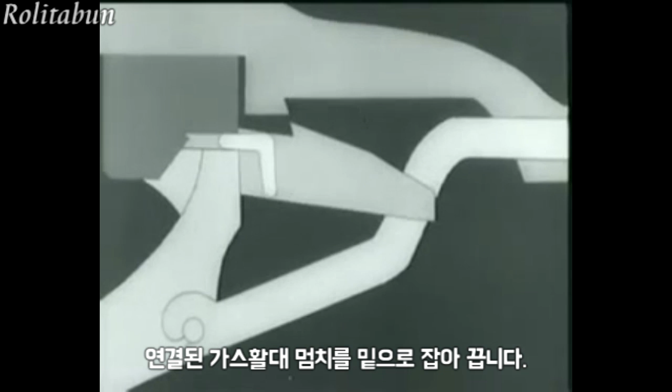We'll now add the operating rod, spring, and bolt to the diagram. Notice that the bolt is held to the rear by the operating rod, and the rod is held by its catch.

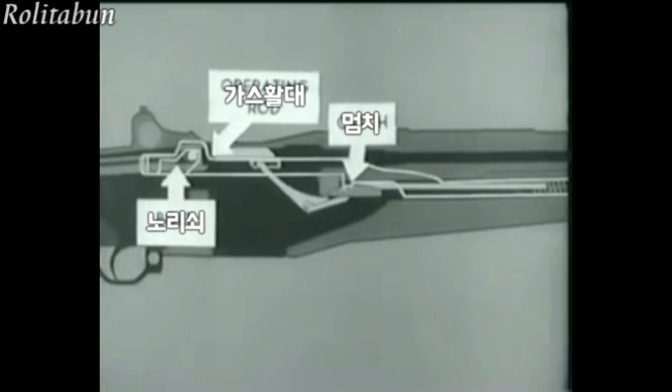Now watch the accelerator as the follower moves down. It rotates, camming the operating rod catch down. When the catch disengages, the rod starts forward, pushed by its compressed spring, and carries the bolt with it.

Take a closer look at the bolt. As it moves forward, a cartridge is stripped from the clip and guided into the chamber by the feed ramp.

When the cartridge is nearly seated, the bolt begins to lock. Watch how the cam surfaces in the operating rod handle act on the operating lug and rotate the bolt into the locked position once more.

Here's the same action on the rifle itself.

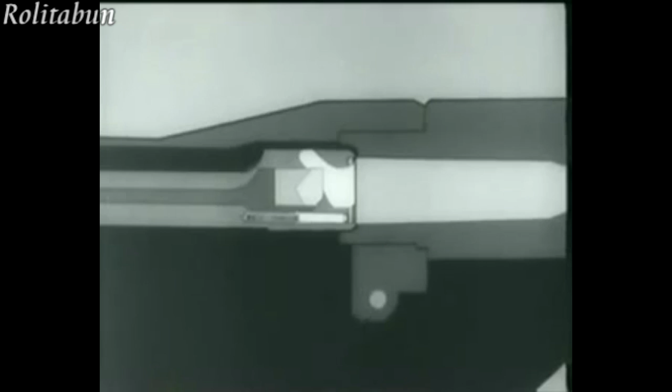Now, as the bolt locks, the extractor snaps into the extractor groove, and the ejector is forced into the face of the bolt, compressing the ejector spring. Remember that this happens as the bolt is locking.

Let's stop here a minute, remove the barrel and receiver from the stock, and take a look at what's happening at the rear of the bolt as it locks.

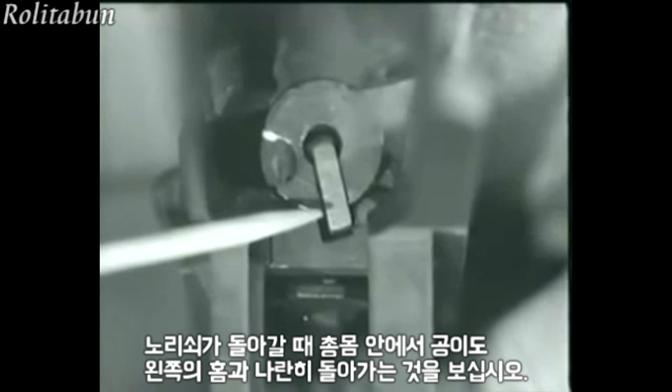Here we are. Now watch the firing pin tang line up with a cutout slot in the receiver bridge when the bolt rotates. Here's the complete action of locking.

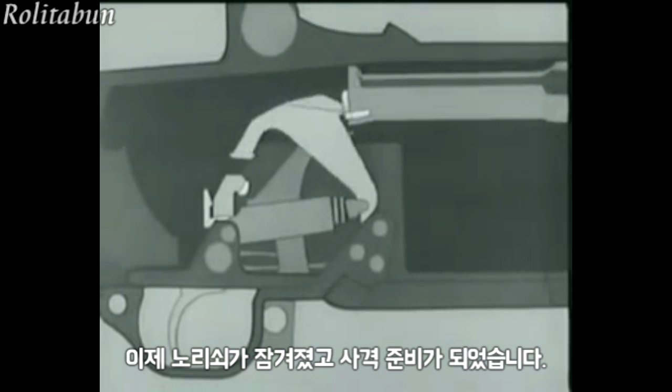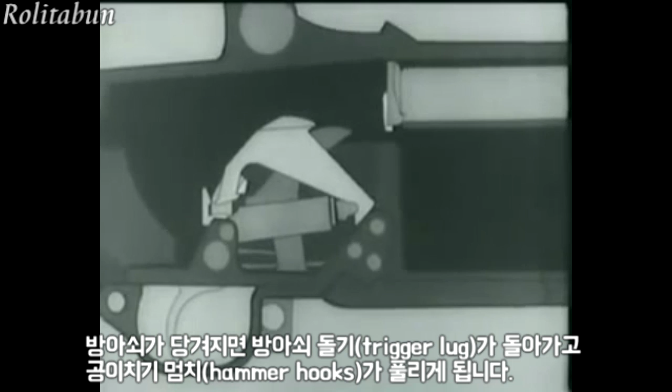Now that the bolt is locked, we're ready to fire. The hammer was cocked and placed in this position when we opened the breech to load the clips. When the trigger is pressed, the trigger lugs rotate and the hammer hooks are released. The hammer spring forces the hammer forward.

Before we fire, here's another point, a safety point in case the bolt is not locked. The bolt camming lug on the left side of the hammer engages in this cutaway portion on the bolt. If the bolt is not completely locked, either the lug will cam it into lock position or the hammer will not strike the firing pin tang. So much for the safety feature.

Now back to the hammer again. The lug engages the cutaway portion of the bolt, and the hammer strikes the firing pin tang, driving the firing pin through the face of the bolt and igniting the round.

The bullet travels along the barrel. Part of the exploding gases escape into the gas cylinder through the gas port, and this gas pressure drives the piston and operating rod back.

The operating rod moves back about 5/16 of an inch before it hits the operating lug. In other words, the projectile leaves the muzzle before unlocking begins.

Then the cam surface in the rod handle hits the operating lug. The bolt turns, unlocking the lugs from the receiver. Watch it again.

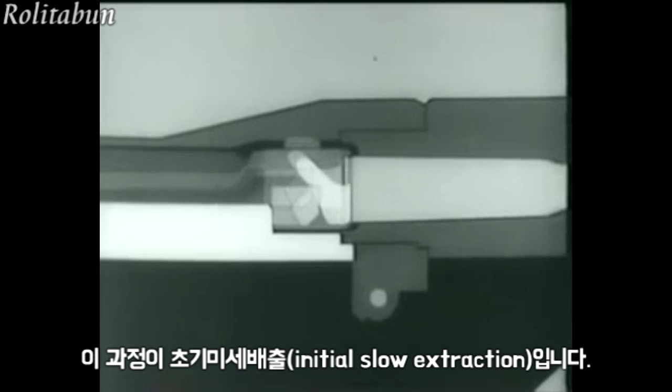The left operating lug cams against a small surface in the receiver, withdraws the bolt slightly, and breaks the cartridge case loose. This is called initial slow extraction.

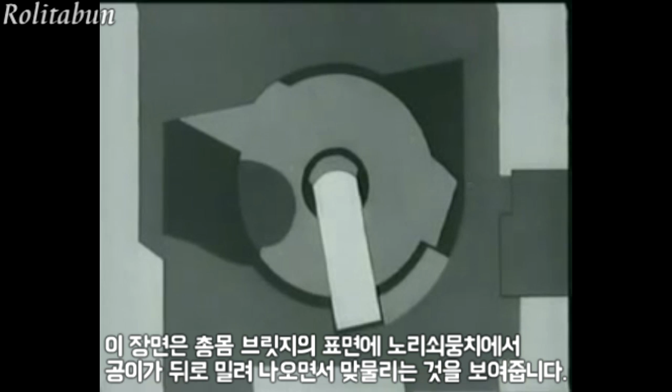At the same time, the bolt camming lug is cammed out of its notch and forces the hammer away from the firing pin tang. This allows the firing pin tang to cam against this surface on the receiver bridge, withdrawing the firing pin from the bolt face.

Here is the same action on the rifle. Now the complete action.

The bolt then is free to move on, and the operating rod continues back with the bolt, compressing the operating rod spring.

As the bolt moves back, the extractor withdraws the empty cartridge case. As the neck of the case clears the breech, the ejector jumps forward, pushed by its spring. The case pivots about the extractor and up and out of the receiver.

Here's the same thing in animation. Now, as the bolt moves to the rear, it forces the hammer back, which compresses the hammer spring. There the bolt is back, and the hammer is caught by the sear. But look at it again. Notice that the trigger is still all the way back, after the hammer is caught by the sear.

The reason is that the hammer is back before the finger can release the trigger. Watch this action in slow motion. Now we let the trigger forward. It frees the sear from the hammer, which starts forward, but it is caught by the trigger lug. Watch it once more.

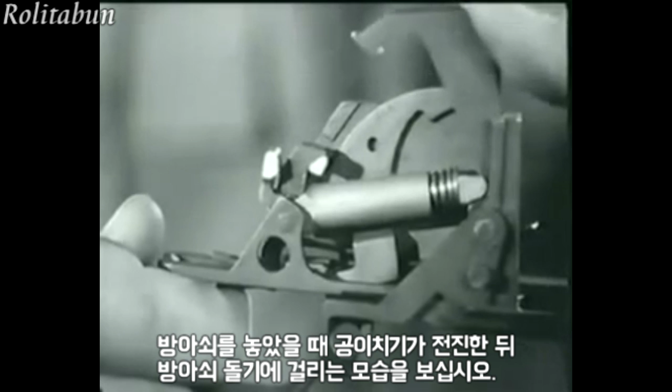Let's take a look at this same action on the rifle itself. Here's the trigger mechanism. Watch the hammer move up and catch on the trigger lug as the trigger is released. It's a very slight movement.

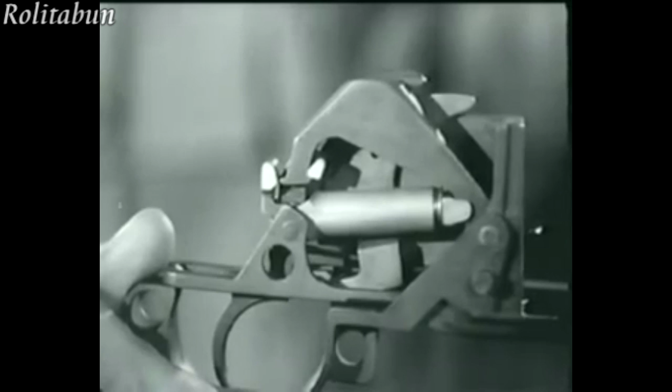We use the diagram and take the bolt to the rear again. Notice the follower move up, pushed by the follower arm, rod, and spring. It pushes the next cartridge up into feeding position.

Now counter recoil starts. The operating rod spring expands. The rod moves forward, pulling the bolt. The bolt strips a fresh cartridge from the magazine and seats it in the chamber. The bolt locks, and we're ready to fire again. The rifle will fire each time the trigger is pressed until the magazine is empty.

Then, when the bolt reaches the rear position, the follower is forced to the top of the clip, and the clip is ejected.

Here's how it's done. Notice the curve part of the follower rod. It cams the operating rod catch up, and the catch holds the operating rod back. Let's repeat it.

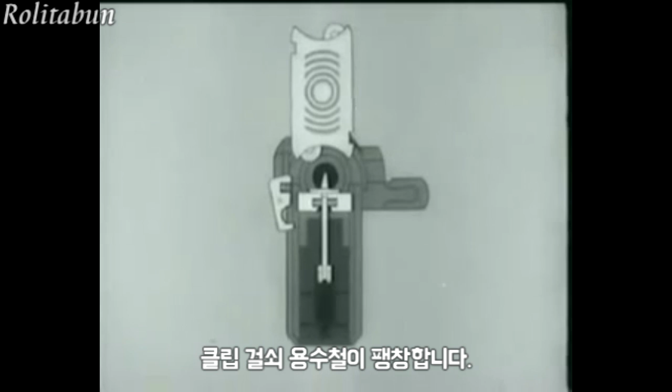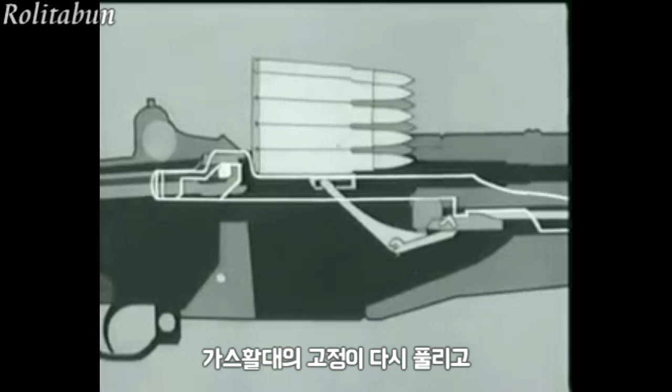When the fresh clip is loaded, the clip latch spring expands, and the latch again engages the clip. The operating rod once more is released, and the bolt goes forward, loading a new round.

Now for the safety. To set the rifle at safe when it is cocked, pull back the safety so that it is inside the trigger guard.

Here's what happens. The safety rotates about the safety stud, and this hook engages the lug on the hammer. The trigger can't be pulled because the trigger lug is blocked by this hump on the safety.

One more point. In case of a misfire, the hammer can be cocked by pulling the trigger guard down. Watch the cocking action.

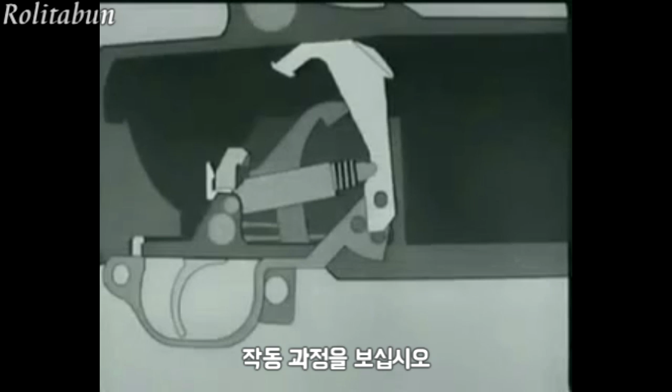Now let's go back and review a few points. A loaded clip is inserted.

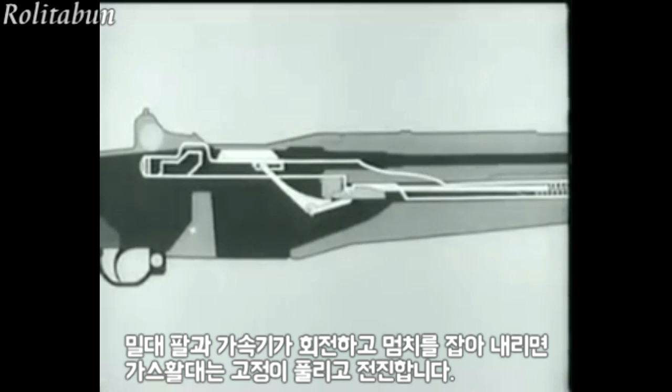The follower arm and accelerator rotate, camming the catch down and releasing the operating rod, which starts forward. The rod and bolt move forward. A cartridge is stripped and guided into the chamber.

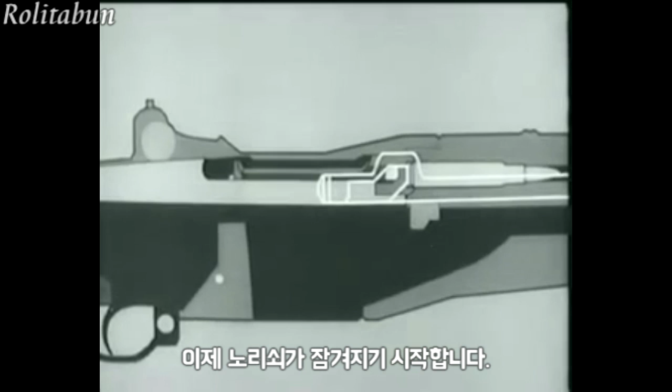Now the bolt begins to lock. At the same time, the extractor snaps into the extractor groove, and the ejector is forced back into the bolt. The firing pin tang lines up with a cutout slot, and we're ready to fire.

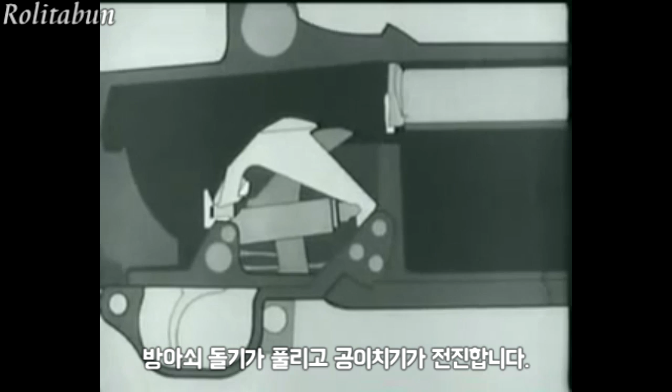The trigger is pulled. The trigger lug rotates, and the hammer goes forward. The firing pin is struck, and the cartridge fired. There goes the bullet.

Part of the gases escape into the gas cylinder and drive the piston and operating rod back. The bolt is hit, rotates, and starts to unlock. Slow initial extraction takes place.

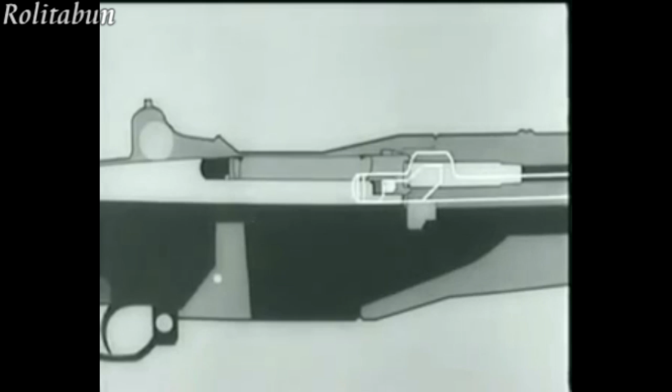The hammer is cammed back slightly. The firing pin is withdrawn from the bolt face. Unlocking is now completed. The empty cartridge case is withdrawn and ejected.

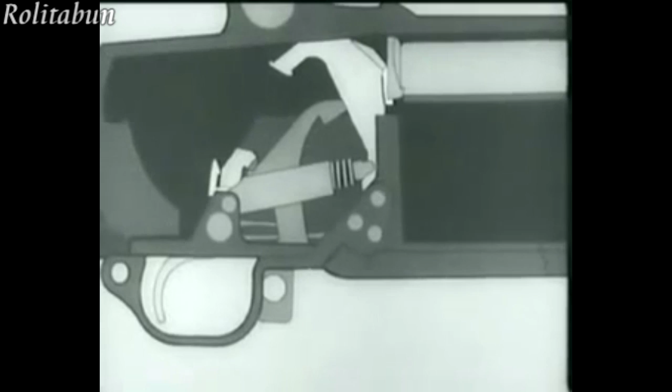The bolt continues back and rides over the hammer. The hammer rotates back and is caught by the sear. Now the trigger is released. The hammer slips from the sear and is caught by the trigger lug.

Meanwhile, the follower moves up, pushing the next cartridge into position. The operating rod and bolt move forward. The cartridge is stripped from the magazine, seated, and the bolt is locked.

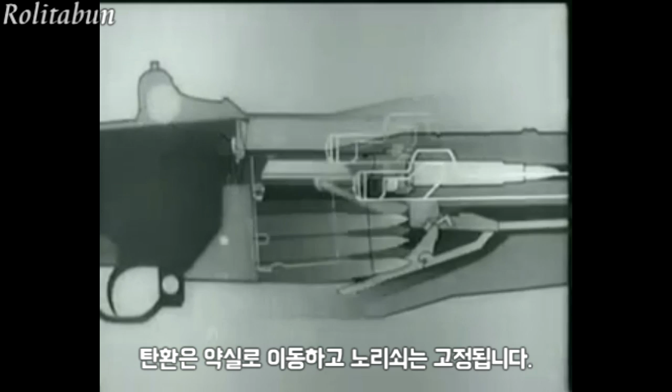When the bolt comes back after the clip is empty, the follower rises, and the clip is ejected. Notice that the bolt stays open.

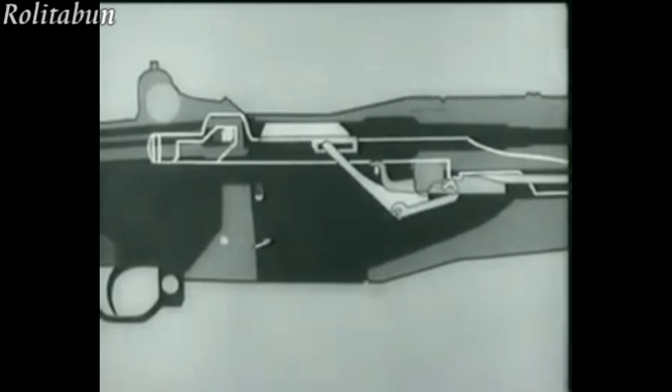Well, that's the inside story of the M1 rifle, and it took quite a while to show what happens in just a fraction of a second. However, a knowledge of how the gun operates will help you plenty. Whether you're in the field or in the shop, if you know your weapon thoroughly, you can keep it firing.